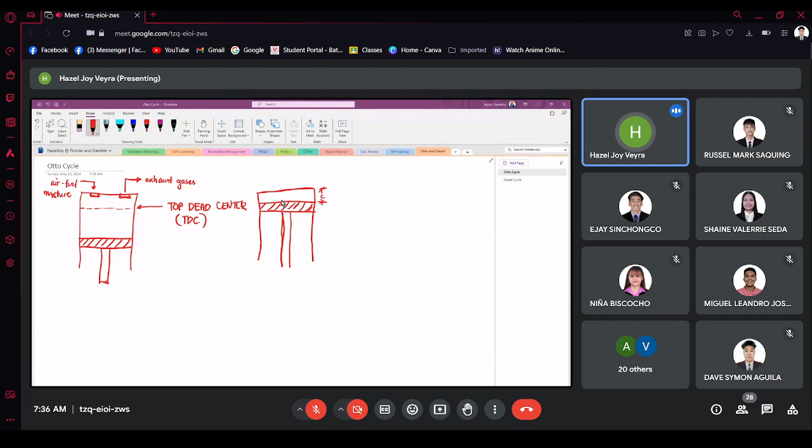Why do you think, guys, it's not up until the topmost surface of the cylinder? What do you think is this portion here? Bakit hindi sagad-sagadan dun sa dulo? Bakit hindi hanggang dito yung piston? Do you have an idea? Why do we have a clearance here? So this is called the clearance, the portion that is not being reached by the piston. Why do we have this space?

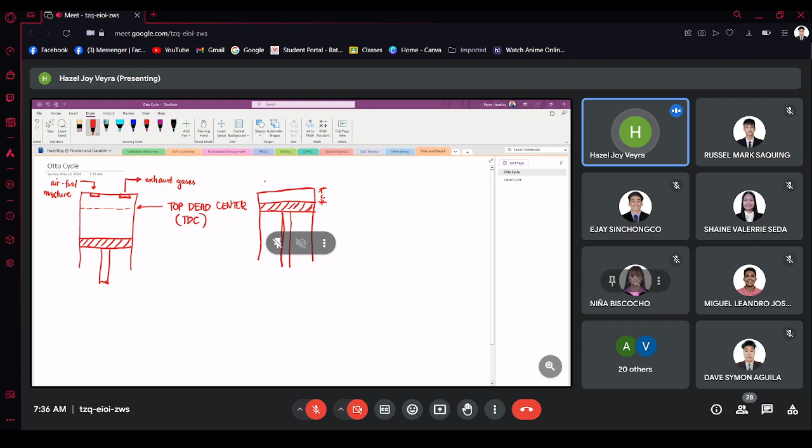It's because this space is allotted for the air-fuel mixture, class. Since this is a matter, it has a volume and it occupies space. So therefore, this portion here is where the air-fuel mixture is being found. And at top dead center, since we have the clearance here, ito na yung ating isang volume na hinahanap.

So yung top dead center natin class, the volume here, ang formula niyan is just the formula of a cylinder. Then the height is the clearance height. Meaning, di ba, what is the formula of cylinder? Ano formula ng cylinder class? Anyone? Formula ng cylinder. Limot na? Di ba cylinder is merong circular base, tapos i-multiply natin sa height.

Di ba? So, meaning class, this volume here, ito na yung minimum volume, which is equal to pi r squared times height 1, which is the clearance. So, height 1 is equivalent to the clearance height here. Meaning, this is the smallest volume na pwedeng magkaroon yung ating piston. Nakakahabol ba lahat? Do you understand? Do you still get what I'm saying?

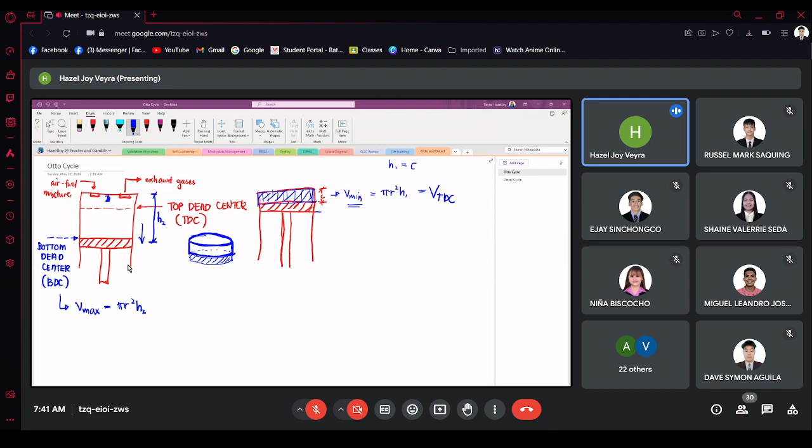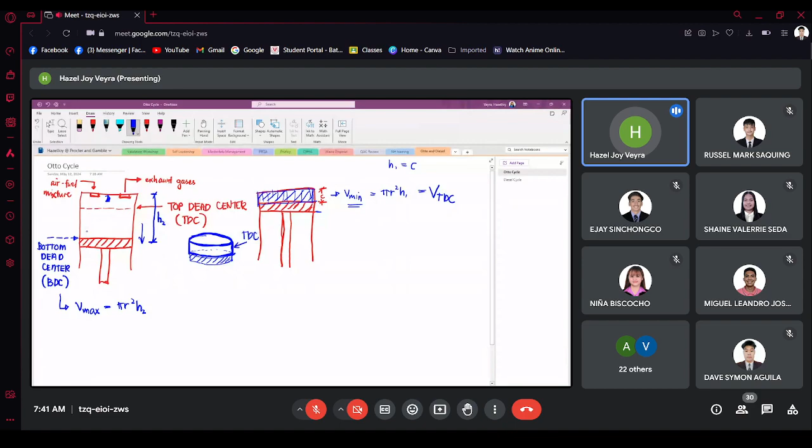No internet. Hello, class? I got disconnected. No?

So, going back, the difference between the volume at top dead center and the volume at bottom dead center is already the volume displacement. Okay? So, here also class, other terms that you will be encountering, for example in your combustion. This portion here, from top dead center to bottom dead center, right, we have this one. But this is equivalent to height 2. So height 2 is only here. Sorry. Height 2 is up to this one only.

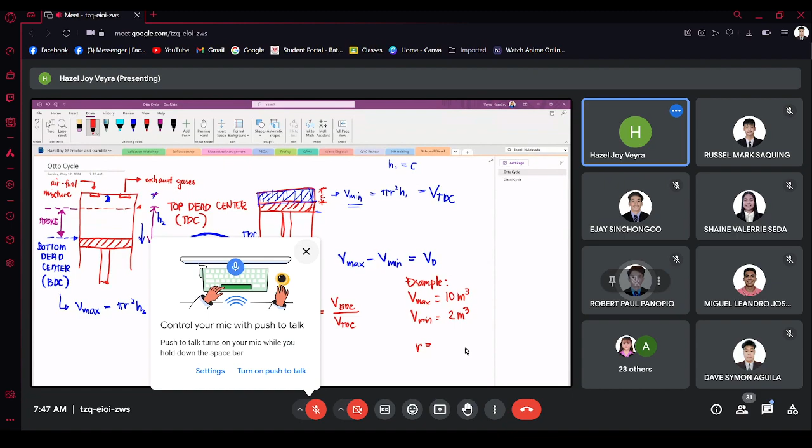Correct. So, Mr. Panopio is correct. So, the compression ratio here, class, is 5. Okay, so that is, again, the ratio between the maximum volume to the minimum volume. Okay? Are we clear on that? So, meaning that is the ratio of this entire volume to this small volume here. Okay? So, those are the nomenclatures of a reciprocating engine or a piston cylinder device. So, let us now proceed with the Otto cycle.

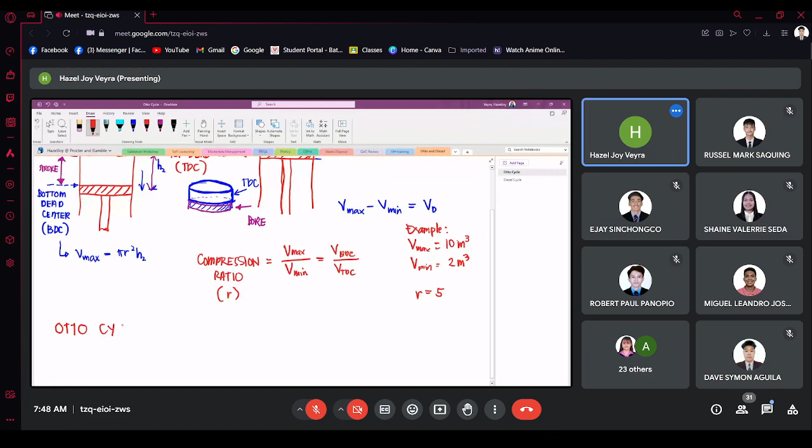Before I proceed with the Otto cycle, again, the basis of the succeeding cycles that I am going to discuss is the Carnot cycle. And going back to the Carnot cycle, do you still remember the 4 processes that a Carnot cycle undergoes? Who can enumerate? What are the 4 processes in a Carnot cycle? Class, this is included in the exam. We have isothermal heat addition, we have isentropic compression, what else? Anyone who can enumerate? Mr. Hoson.

Ma'am, process 1-2 is isothermal heat addition. Then process 2-3 is isentropic expansion. Then process 3-4 is isothermal heat rejection. Then process 4-1 is isentropic compression. Okay, very good. So, those are the processes in a Carnot cycle.

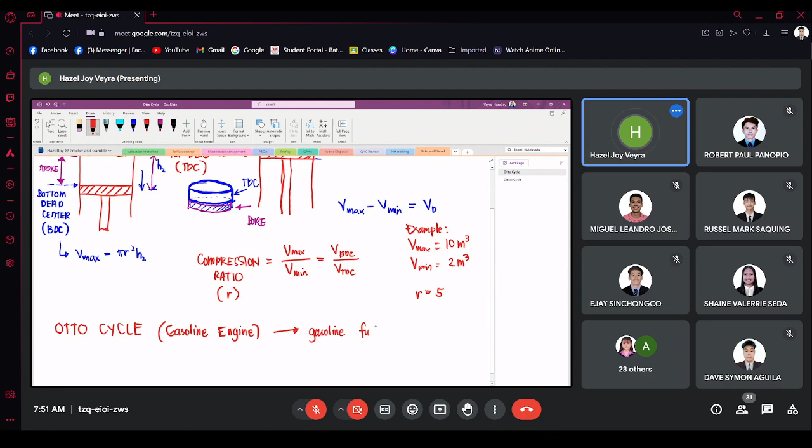So now, let us proceed, class, with the Otto cycle. So Otto cycle, class, this is the gasoline engine. So if your car utilizes gasoline, it follows the Otto cycle. Okay? So the ideal or air standard cycle for spark ignition engine, commonly known as gasoline engine, is the Otto cycle. All spark ignition engines are designed for gasoline fuels. Gasoline fuel siya. Later, we'll know the difference between a gasoline engine and a diesel engine.

So, sino dito ang merong sasakyan? So, if you are using gasoline, you have a gasoline engine and it follows the Otto cycle. Whereas if you have a diesel engine, diesel cycle yung fina-follow niya. And the fuel in a diesel engine is of course diesel. And later we will know the difference in terms of the processes na nangyayari in the piston cylinder. And we'll also know how the work is being generated. Paano ba umaandar yung sasakyan? Saan ba nanggagaling yung work?

Okay? So, this cycle, the Otto cycle class, is a constant volume combustion cycle. So, Otto cycle is a constant volume combustion cycle. Okay? And it was named after Nikolaus Otto. FYI lang. This is named after Nikolaus Otto. That's why it's called Otto cycle.

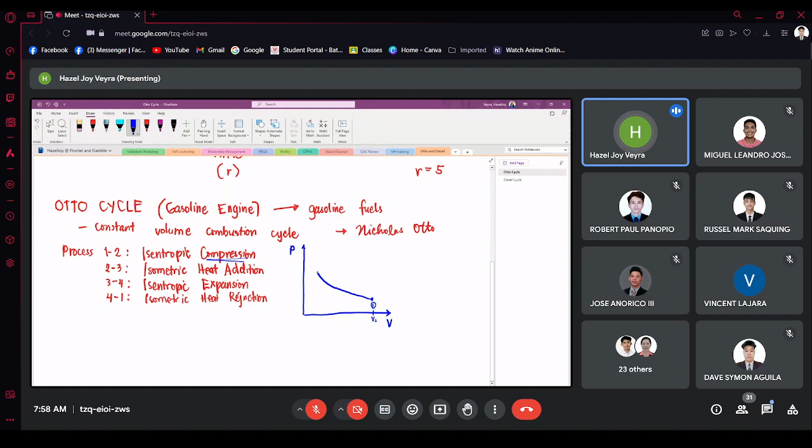Therefore, from state point 1 to state point 2, volume will decrease. So, papuntang left yung ating PV diagram. From this state point, pupunta tayo dito sa state point dito. So, parang ganito siya. This is our state point 2. So, notice we have the new volume here. This is V1, this is V2. See it, class? So, this process here is isentropic, meaning constant yung ating entropy. Na-compress, the volume decreases. Okay? Next, process 2 to 3.

And sabi dito, this is an isometric heat addition. So, if you have volume 2, where is volume 3, the volume at state point 3? Again, this is an isometric heat addition. Where do you think is state point 3 going to? Papunta saan? Constant. Okay. So, pataas po. So, this is isometric heat addition.

So, meaning volume 2 and volume at state point 3 will have a constant volume. Meaning, dito lang siya. Kapantay lang ng volume 2. So, papunta dyan. Pantay lang to. Lagay ko lang ng arrow para sa direction. So, ito yung ating state point 1 going to state point 2 and state point 2 going to state point 3. So, this is your state point 3. Now, we're done with process 2 to 3, which is an isometric heat addition.

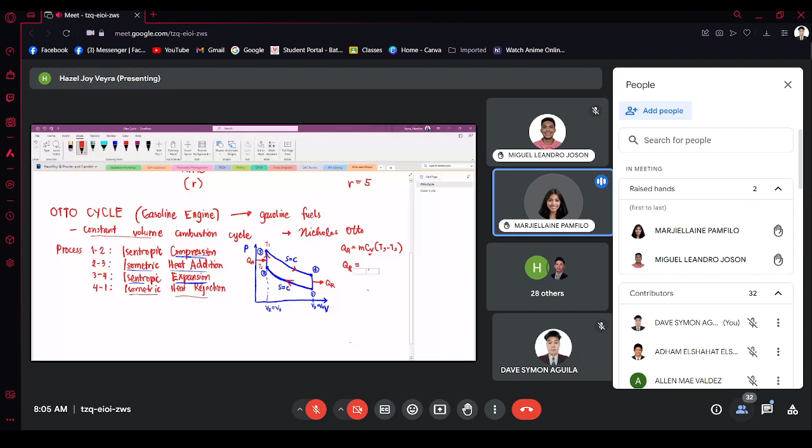What do you think, class? Itong sa state point na to, para medyo may analysis na tayo, ano yung mga inilalagay na state points sa analysis ng formula ng cycle. What do you think is the formula then for heat rejection? Di ba heat rejection natin is from state point 4 to state point 1? Yes, Miss Marjiellaine. mCv times T1 minus T4 po. Correct. So this is mCv(T1 minus T4).

So, heat added natin between state point 3 and state point 2 siya nangyayari, di ba? Kaya yun yung temperature na pinagmamaminus natin. And heat rejection, nangyayari siya between state point 4 and state point 1. Pwede rin ito, class. You can also write this as QR is equal to negative mCv(T4 minus T1), kung gusto nyo mauna yung 4. Since heat is being rejected, you can write negative in front of the formula.

So this one here, yung sinabi ni Marjiellaine, is already the simplified formula, since we already distributed yung negative sign, which is an indicator that heat is being rejected. You get it, class? So either of the two will do. Clear ba? Yes, Mr. Joson? May question lang po.

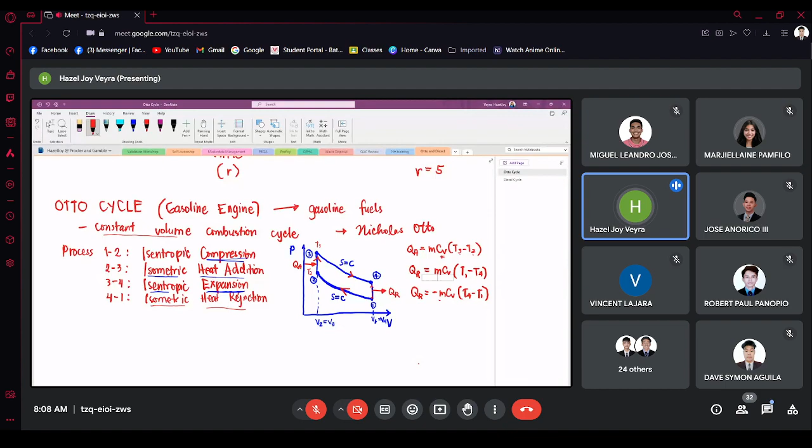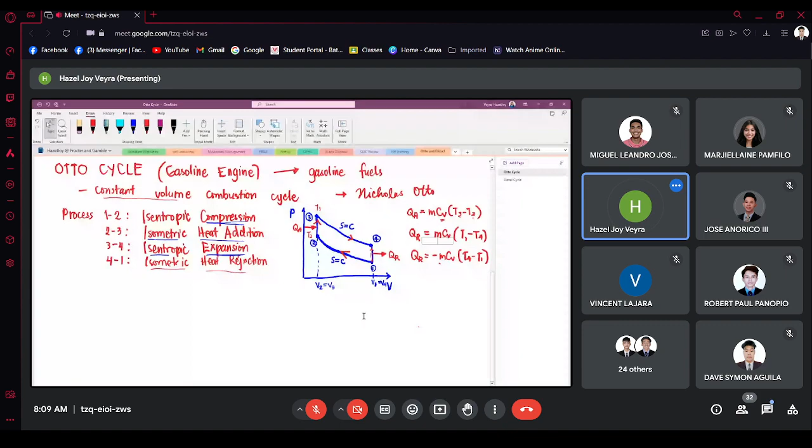Okay, saan naman dito yung work natin? So, let's draw naman yung TS diagram. So, sa TS diagram class, we have the temperature at the y-axis and entropy in the x-axis. So, let's start with process 1 to 2. So, dito class, start tayo dito sa state point 1, which has a low temperature.

Yun yung sinasabi ko class dito, kaya pag nag T1 minus T4 ka, low pa yung temperature mo dito. So, negative din yung makukuha mo sagot dito. Dito naman, positive yung makukuha mo sagot since ang T4 is usually higher temperature than T1. Kaya, when you multiply ito negative, ito ay positive, since heat rejected siya, magiging negative siya. So, pag after nitong TS diagram, makikita natin yung temperature na sinasabi ko.

Okay? So, dito class, we have state point 1. And yung process natin going to state point 2 is an isentropic compression. Meaning, ano ang value ng entropy natin at state point 2? Isentropic. S1 ay, di ba class, meron tayong entropy sa state point 1. Kung isentropic, yung papunta sa process at state point 2, ano yung entropy natin sa state point 2? Class. Ulitin ko, isentropic yung process. Kung may value ako ng entropy sa state point 1, ano yung entropy sa state point 2, kung i-compare mo sa state point 1?

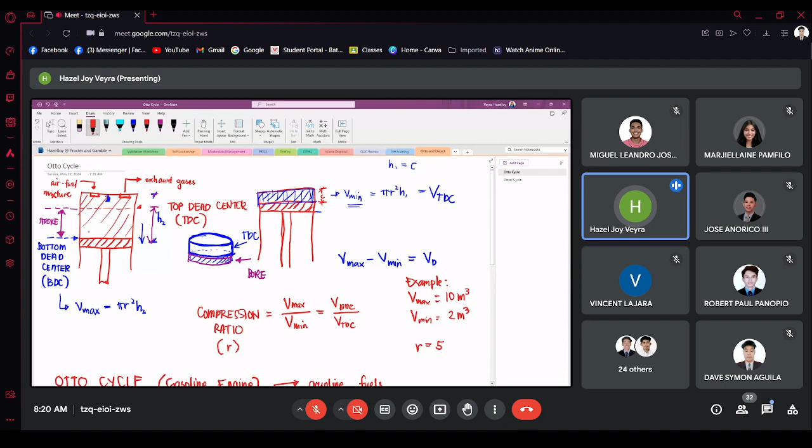Okay. Ngayon, class, I will also give the formula for the percentage clearance. Ano naman yung percentage clearance? Percentage clearance, class, is, balikan sa ating cylinder, etong clearance na to, meaning this is the volume ng clearance, right? Yung sinabi ko kanina, yung VTDC, this is the volume at the clearance, yung clearance sa top dead center. So, yung percentage clearance natin, class, that is equal to the volume of the clearance over the volume of the displacement. Again, that is the volume of this clearance over the volume of this entire region here or this entire space here. That is the percentage clearance.

Or, alternate formula natin for this one is 1 over R minus 1. So, it should be the same. So, R natin again is the compression ratio. So, again, percentage clearance is equal to the volume of the clearance over the volume of the displacement, or that is equal to 1 over R minus 1. So, dito, ang volume ng displacement natin is ano kaya? Volume of the displacement here, class, dito sa ating PV diagram, VD is equal to V1 minus V2. Volume here minus volume here, that is the volume displaced, from the initial state point after the compression.

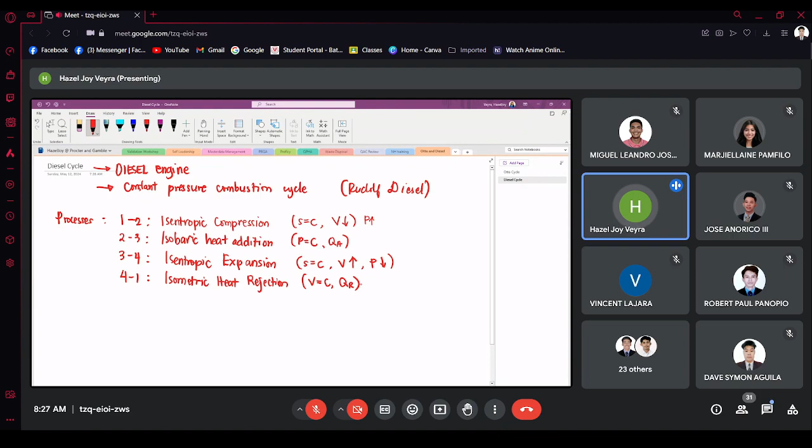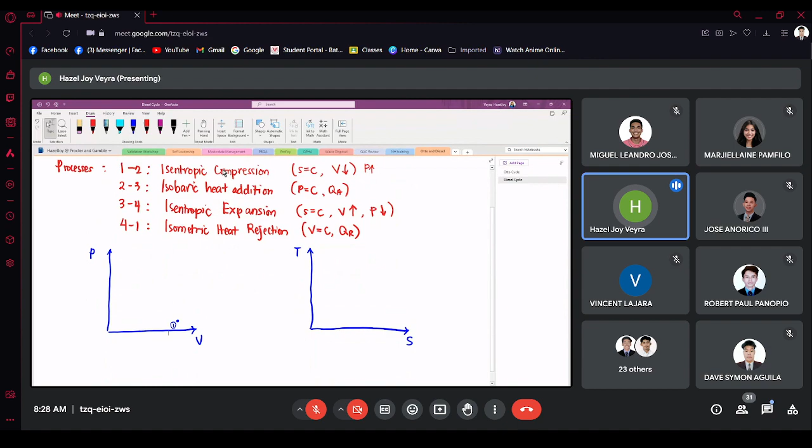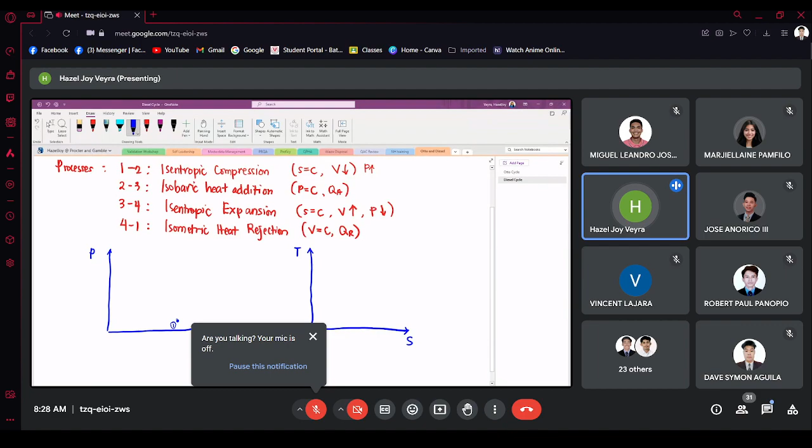So, ang itsura niyan class is ganyan. So, this is your state point 2. This is going here. Pagdating naman sa TS diagram, so this is an isentropic process. So this is your state point 1. Since isentropic, constant entropy, ang entropy at state point 2 is equal sa entropy at state point 1. So nandito lang siya. Equal lang siya. Okay? So that is constant entropy.

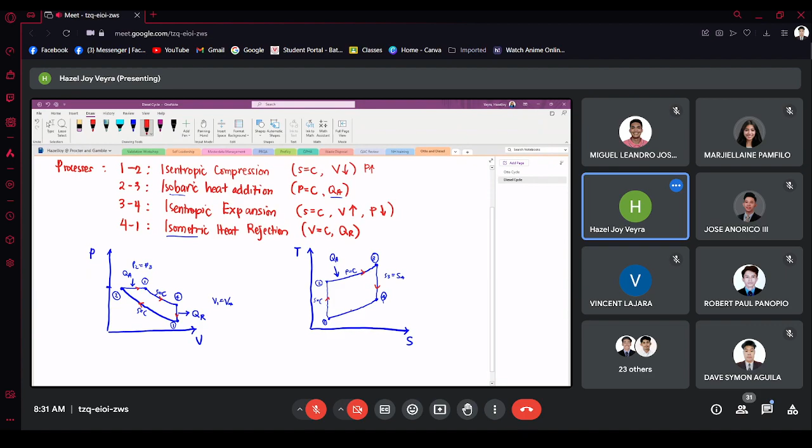So, yun na si diesel engine. Again, this is a constant pressure combustion cycle. Ang heat rejected natin ay dito. So, yun na siya, class. Ang overview na lang yung nagawa natin sa isang diesel cycle. So, at least, you have the knowledge on paano nyo i-correlate yung processes sa paggawa ng PV and TS diagram.